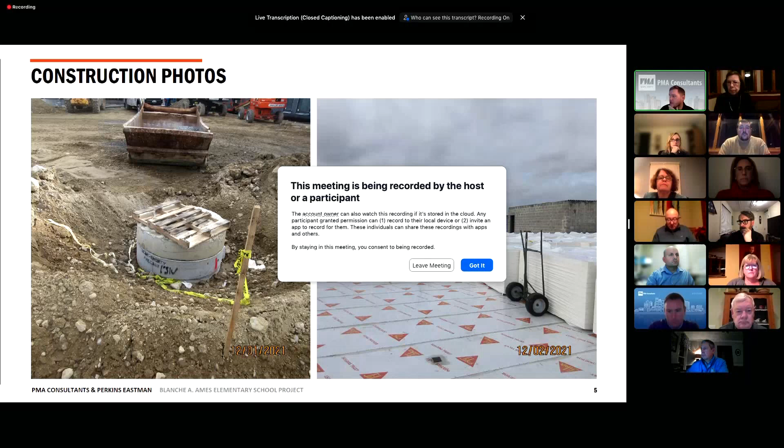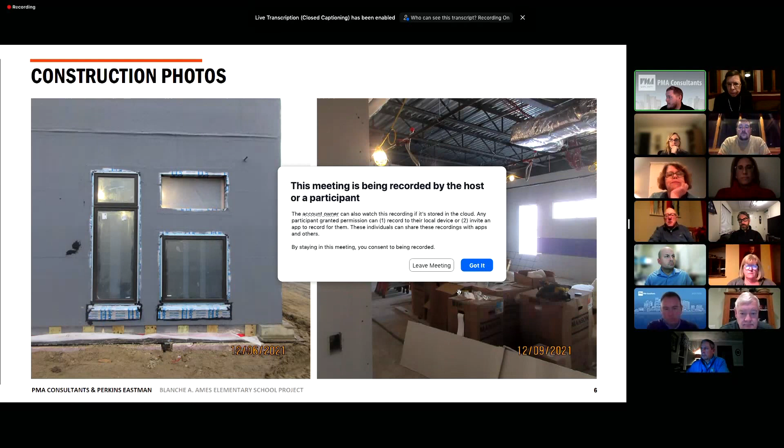You can see here the borrowed light in between the classrooms in these areas on the left. On the right, you can see what we call the roof monitors. This is in the two-height areas, the cafeteria, the CAF 1 area, there's two of these. They bounce light in. This is a south facing window that's going to take that natural light and bounce it off of not a reflective surface, but a bright surface, and get it down into the area. Walking through the building, you can really see that feature, and it really does bring a lot of natural light into that area, which is great.

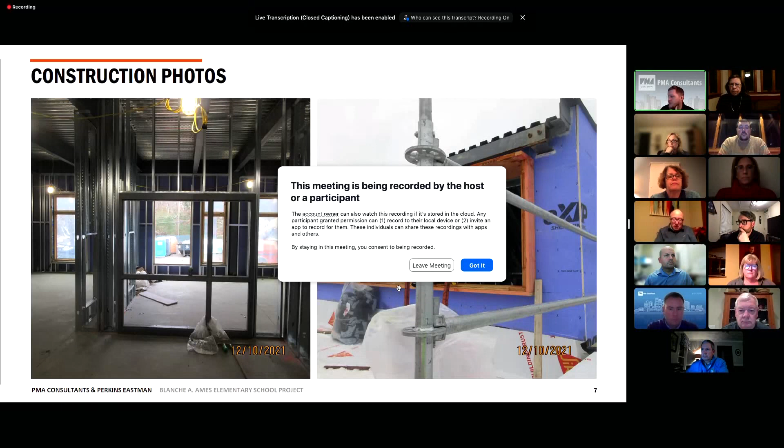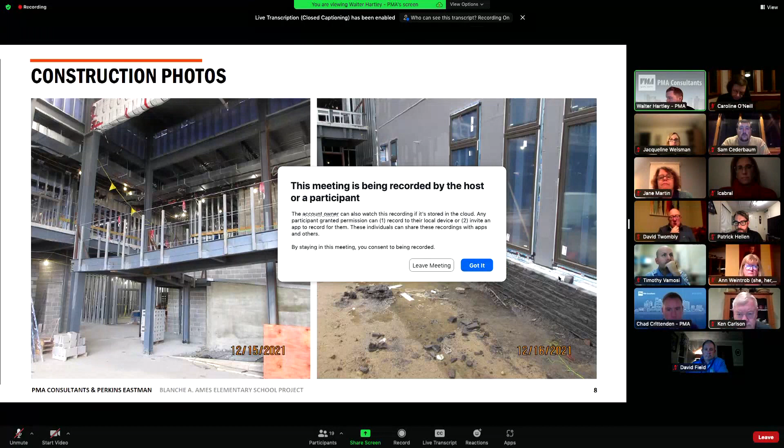On the left, if you look up, you can kind of see where the roof monitor is. That beam that's wrapped up is a glulam beam, and right above that is one of the roof monitors. In the middle of the picture, you can see the ramp that's going up. They're getting very close to being able to pour that. We'd expect in the next month, probably prior to our next building committee meeting, they'll be ready to pour the ramp, which is great. As I mentioned on one of the first pictures, you can see the updated field stone masonry veneer, the 1'8", I believe, or 2'4" in this area. So this is a smaller height area with the field stone, but that's moving around the building, which is great to see, a real natural product.

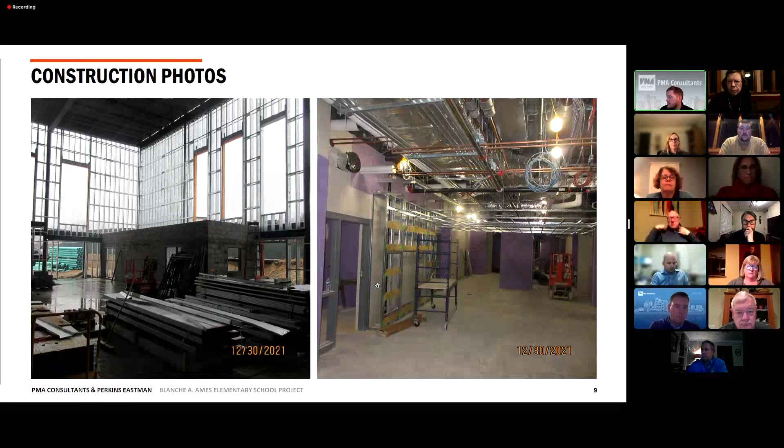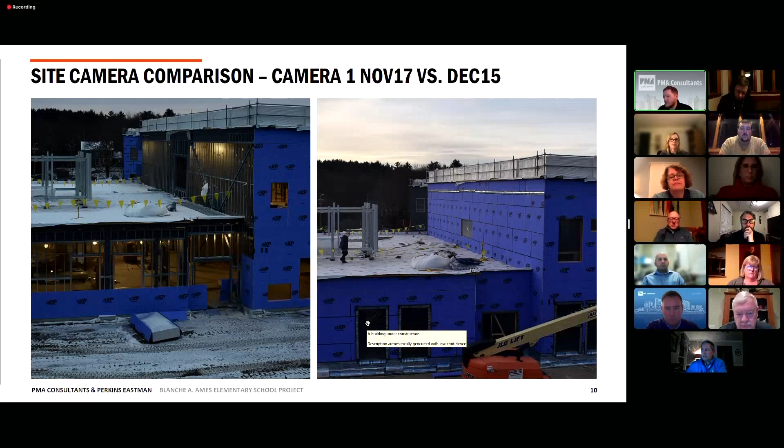You can see that the building is fully sheathed in and nearly temporarily insulated with some temp windows or some temp doorways.

Here you can see the windows were nearly all temped in on the second floor on the left, and now we've received a majority of the windows. We have some of the horizontal windows that need to be finished on the right, but you can see the progress being made there, and how the base was just concrete before, and now we have the fieldstone masonry there as well.

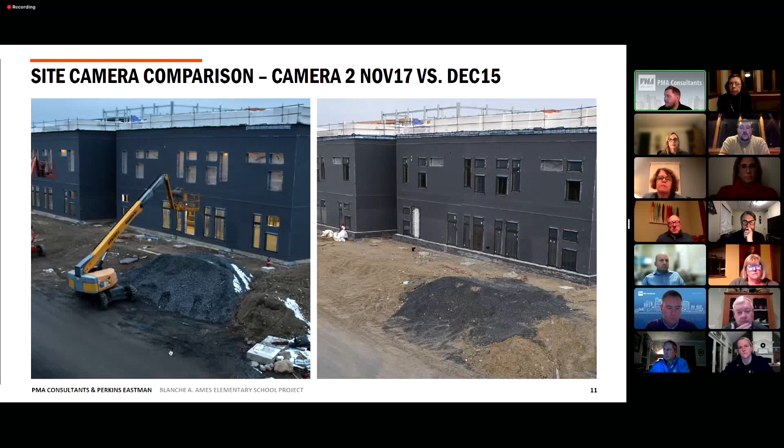And you can see over in the back corner that A building has been sheathed in, so we are nearly tight in A building. We'd expect to be probably tight by the end of the month and be able to get heat throughout the entire building. So we have some new temporary heating units that are going to be placed in the courtyard as well, in between B building and C building, B and D building.

So that's a quick construction update. I can see everyone, so if anyone has any questions about the construction progress, I'm happy to take those.

All right, we'll jump right along to a cash flow and schedule update. So through the month of December, I think the only invoice we're missing is PMA's. I just received that, so we'll get that in. But billed to date is 34.7 million.

MSBA reimbursement to date is 11.6, and the next MSBA audit that'll be going in is for about $12 million. We don't have a number that we're targeting for reimbursement, but that would be the next submission going in.

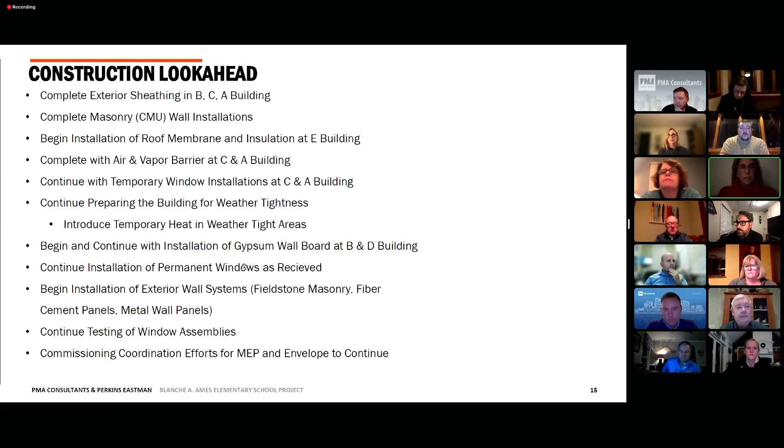We'll likely get a change order over to the select board the first week in February. Next meeting is February 16th, followed by March 16th, and then April 20th, the third Wednesday of the month at 5:30.